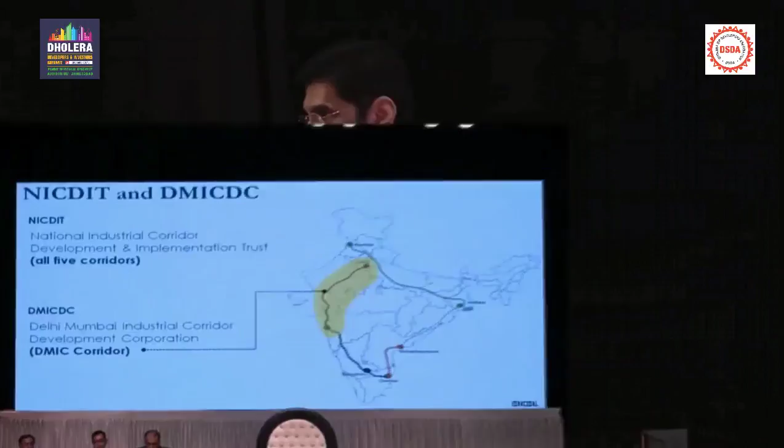So now you know the difference between where Dholera is as a greenfield smart city and where the other smart city programs are. They have no connection, the funding mechanism is different, and the management is completely different.

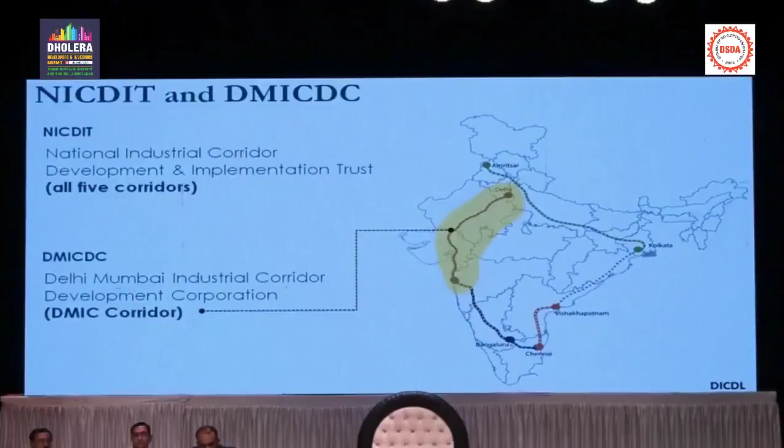But they are routinely mixed up. One is called the other, and people call it a smart city Dholera, and they think it's a part of the brownfield smart city.

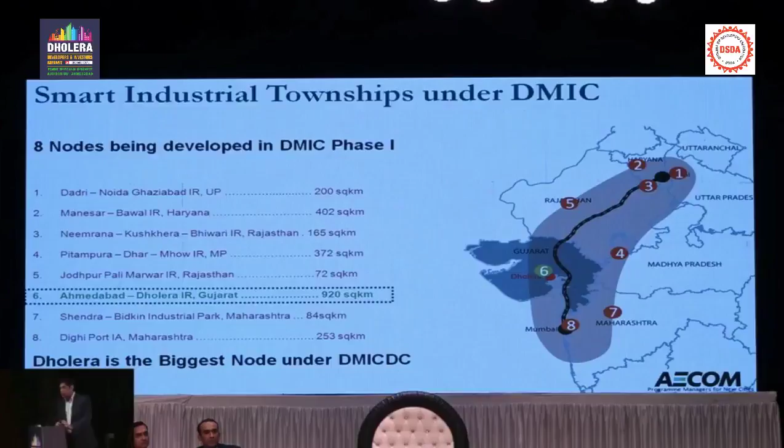So on this Delhi-Mumbai industrial corridor, there are 8 different nodes, as they call it, industrial areas that are planned. You can see number 6 is Dholera, and this is the largest node on this Delhi-Mumbai industrial corridor. So Dholera is the largest. It is also the node that has come farthest along in terms of construction.

So how big is Dholera? Dholera is 920 square kilometers, but if you compare that to some countries like Singapore, it is even bigger than Singapore. We are almost building a country like Singapore, because Singapore is 71,900 hectares and Dholera is 91,000 hectares. So it's almost 20% bigger than the country of Singapore.

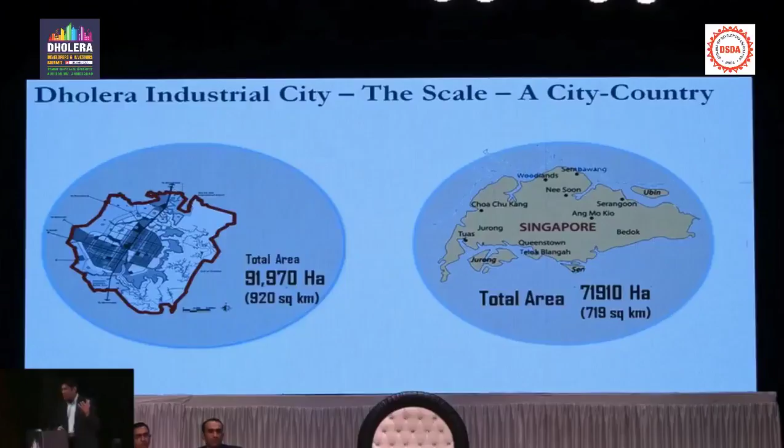So now you can imagine why it takes time, and I will explain that also.

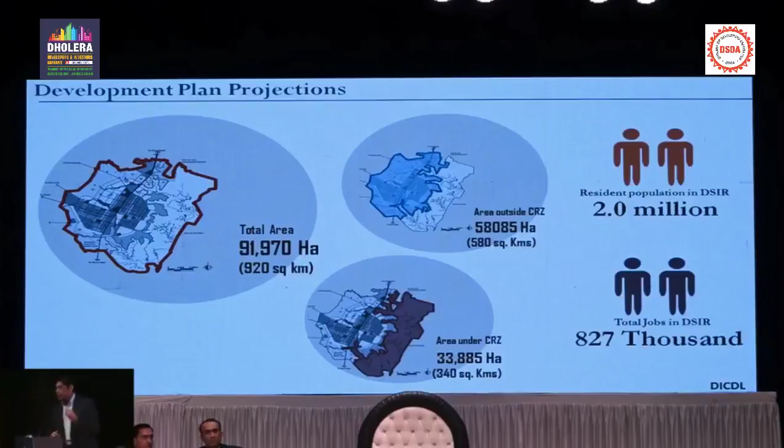I've been working on this project since 2013, and a very common question that comes to me is, why does it take so long to build a city? So I wanted to show you the timeline as to why it takes so long.

In 2009, we enacted the SIR Act. But once the SIR Act is enacted, several things have to happen before you start building a city. You have to create a development plan, which takes some time, and then it has to be approved. To get a sanctioned development plan takes anywhere from 3 to 5 years, because it is a formal, official document of the government of Gujarat. It has a public review process, a public comment timeline, and it takes that long. You cannot rush it. It's like saying, deliver me a baby in 3 months - the baby will take 9 months, give or take a month. So a development plan will always take 3 to 5 years because it is a time-consuming process.

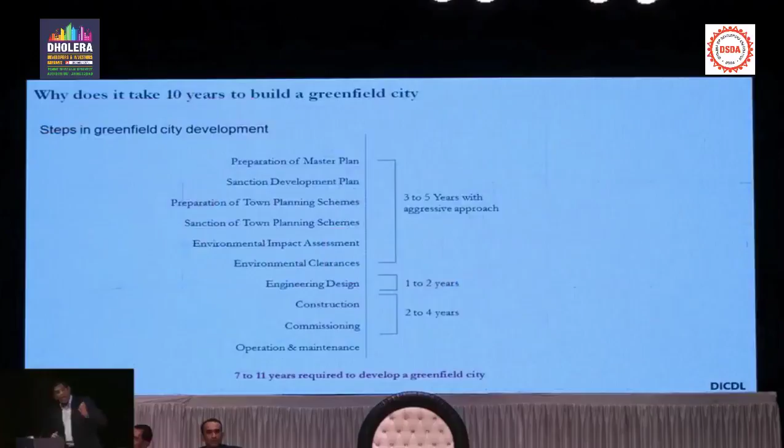After the development plan, we have to do the design. After the design, then we have to do the construction. So you can see, by the time we go through the entire process, we are anywhere between 7 to 11 years.

Now Dholera - जैसे एडवर्टाइजमेंट किया था, मोदी जी ने पहली बार बताया था 2009 में मेरे ख्याल से, धोलेरा शहर आएगा, बहुत बड़ा बनेगा, सिंगापुर जैसे होगा, and everybody was saying, कितना देरी हो रही है, how late it is becoming, you cannot build a city.

But now you can see why it takes time. There is no way - maybe एक आध साल हम ज़्यादा expedite कर सकते थे, but some of these things take time: development plan, design, construction. So these all take time, and it takes 7 to 11 years to build it.

I also want to put in perspective Songdo in South Korea, which was the latest brand new city like Dholera that's being built, started in year 2000. Today, in 2017, it is only 50% built, and it is only 8 square kilometers. We are 22 square kilometers starting with, going up to 900, and Songdo is only 8 square kilometers, and it is taking them 15 years.

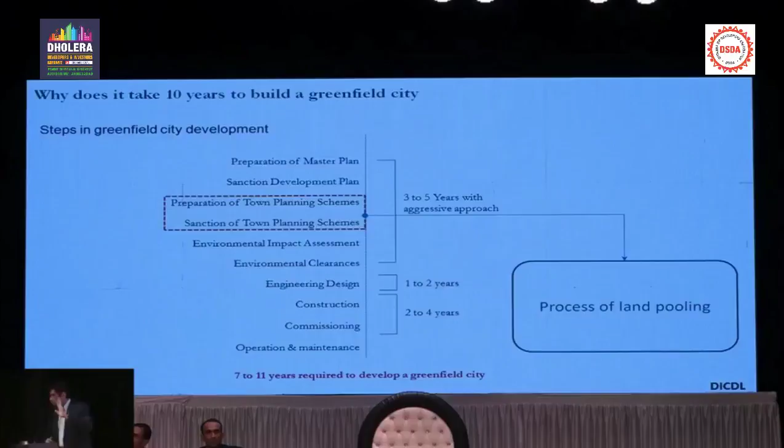So we are not behind in terms of benchmarking in the world. We are doing a great job. So I want you all to know that the state of Gujarat, the Gujarat bureaucracy, and the engineers are all doing a fantastic job. So don't worry, this will happen, and I will show you how this will happen.

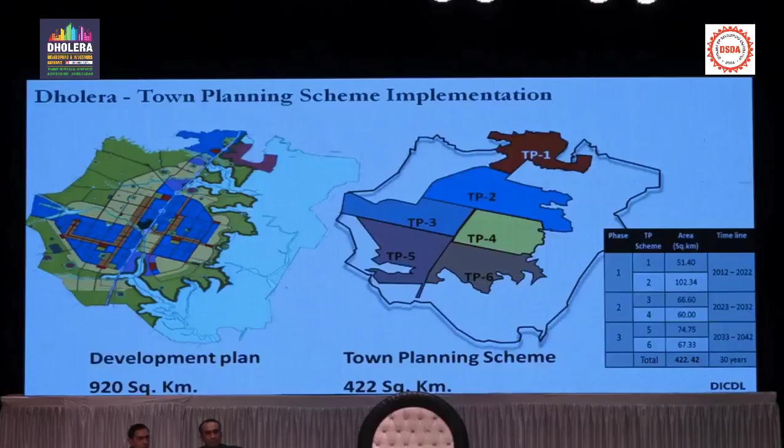So phase 1 is up to 2022. We are doing the construction. Uske baad phase 2 aur phase 3 chalu hoga, right? But within phase 1, if you look at phase 1, it is 153 square kilometer, which is TP1 and TP2.

हमने इस पे कंस्ट्रक्शन करने का काम चालू किया था 2013-2014 में. But we soon found out that the cost of building trunk infrastructure - those of you who are in construction will appreciate this - for 153 square kilometer is close to 40,000 crore.

अभी ये 40,000 crore investment हमको कौन देगा? Because there is no private investor that's going to come and build all the pipes - water, wastewater, power, gas - everything has to be built, right? So what we had at our disposal, हमारे पास खाली 3,000 crore थे जो गवर्नमेंट ऑफ इंडिया ने हमें ग्रांट दी थी. तो 3,000 crore में हम क्या क्या बना सकते हैं, तो हम बैकवर्ड्स कैलकुलेशन करके हमने एक 22 स्क्वायर किलोमीटर का फुटप्रिंट चुना. ये 22 स्क्वायर किलोमीटर के फुटप्रिंट में हम 3,000 से 4,000 करोड़ खर्चा करके पूरा इंफ्रास्ट्रक्चर बनाने वाले हैं.

Complete ready-made infrastructure - we call it plug and play. So you come in to the plot, everything will be ready to plug in, just like a new laptop nowadays.

Now 22 square kilometers, लगता है कि क्या छोटा है, 900 square kilometer किधर, 22 square kilometer किधर, but आप सोचो 22 square kilometer is about the size of the city of Mumbai, the island city of Mumbai - from Colaba to Bandra is 26.2 square kilometer.

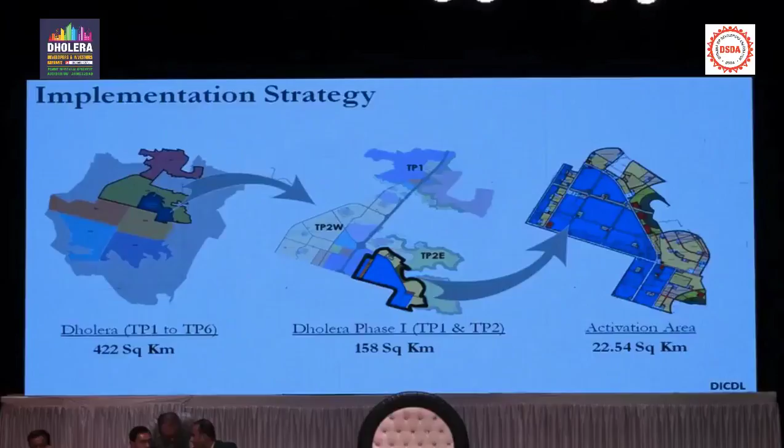क्या आपको बंबई छोटा लगता है? Okay, so this is not that small - 22 square kilometer is a city in itself. Gandhinagar is about 40 square kilometer total, and its planning started in 1965, but even now it's not 50% complete. So new cities take time, and 22 square kilometers is not a bad size - it's actually big, but because of industrial production, it will grow very fast once companies start relocating. So within this 22 square kilometers, this is the breakdown.

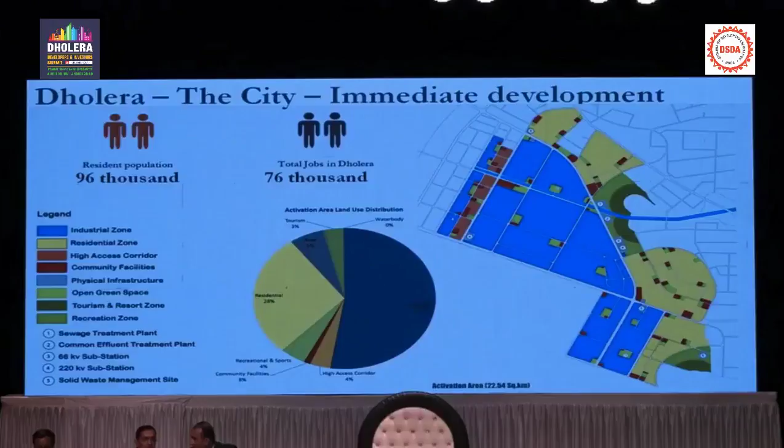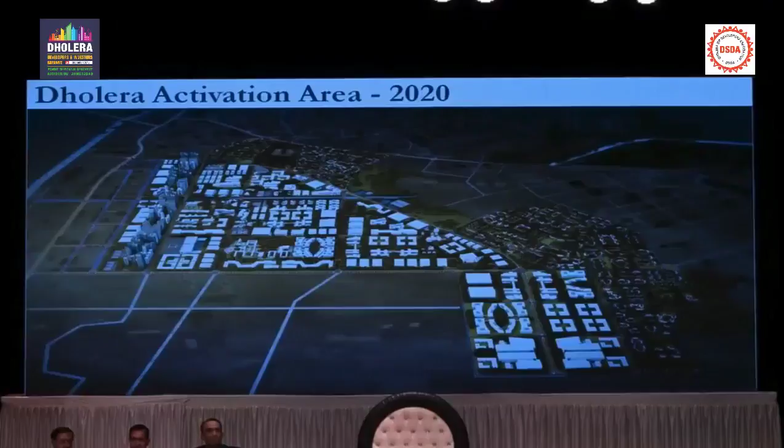So this 22 square kilometer is our footprint, and this footprint of Dholera is going to be managed by DICDL.

DICDL is a special purpose investment vehicle, an SPV, formed between DMIC-DC and the state government of Gujarat. This is a special partnership, 51-49%, in which DMIC has put in 3,000 crore cash and the Government of Gujarat has given 3,000 crore worth of land. So our corpus became 6,000 crore, and with this 6,000 crore we have started the initial trunk infrastructure.

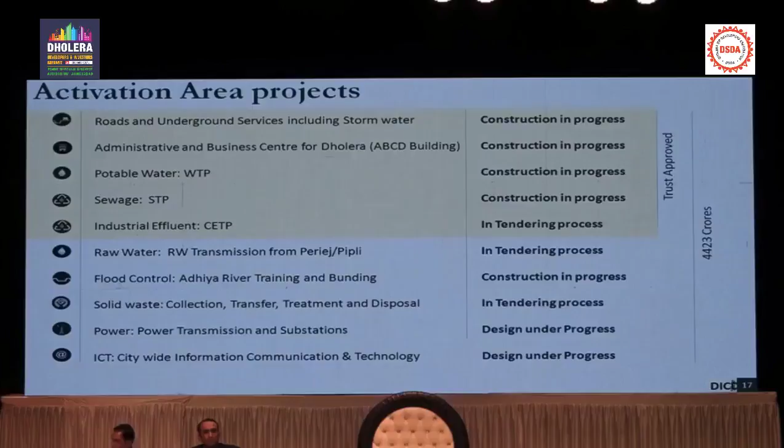So what are we building in Dholera right now? We are building all these trunk infrastructure projects - this is what the DMIC Trust has approved right now, and the trust approval is 2,784 crores, which is the money already authorized to us. The balance of 4,400 crores, we are going to find through PPP, a private partner - mostly on the power and water side. We will figure out how to get that funding done, but right now we are proceeding.

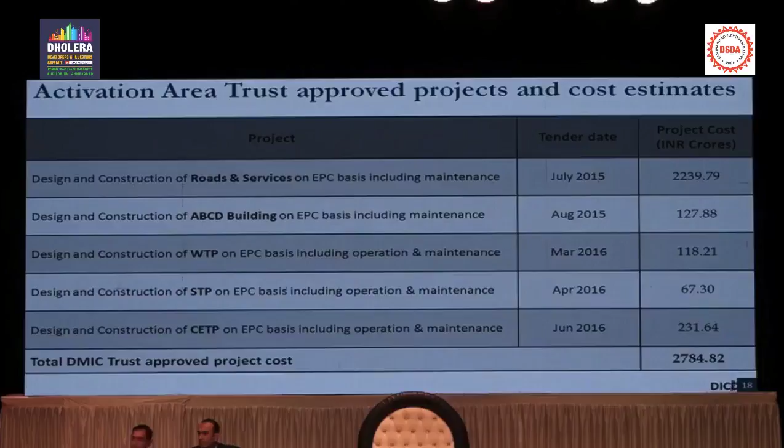We have 5 construction contracts already let out. L&T has the largest construction contract - you saw them in the film earlier today. Cube Construction, CCEL, is doing the ABCD building. L&T is also doing the sewage and the CETP. And SPML Construction from Delhi is doing the water treatment plant. So we have the country's largest 5 contracts being let out at this amount.

Now I want to get into connectivity, because the second most frequently asked question to me is: your Dholera is so far away, 100 kilometers away - where will people go, how will they settle there, who will go to live there? So I want to remind everyone that there are many places in the world where you start a new city that's 50, 60, 80, 100 kilometers away, but very soon, over 10-20 years, it merges into the nearest main city.

In our case, we are hoping that Ahmedabad will be the nearest main city because it's a more vibrant, bigger community. We are also introducing this concept of twin city, where Dholera and Ahmedabad will become almost like a twin city. Maybe not now, but in a few years, because the corridor between Ahmedabad and Dholera is right now building a 6-lane access controlled expressway.

That expressway is actually under design by the National Highways Authority of India. It has already been funded, and land acquisition has started.

We are also building a metro inside the expressway that will reduce the commuting time between Ahmedabad and Dholera to less than 45 minutes. When that happens, distance will no longer be an issue, and it will become a true twin city concept. With a metro, you can sit, sleep, read your book, be on your Wi-Fi, and at the same time go to work, relax, and not drive.

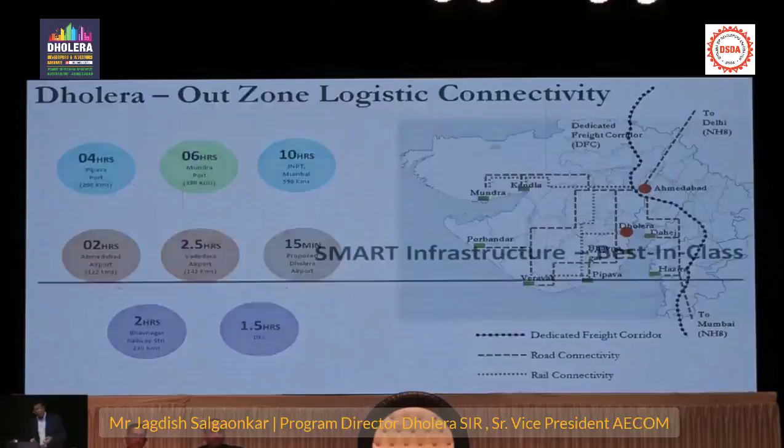Okay, so now let me switch gears a little bit and speak about smart cities. I'm sure the word smart cities has been so overly used that people are curious what it actually means.

Can anyone give me a one-line definition of what smart city means to them? Does anyone have that? Okay, well I'll give it a shot then. This is sort of my own definition, compiled from many different sources, but it's really our thinking of what we have come across.

A smart city — the city itself is an inanimate object, it is just a dead thing. But what makes it smart is that we have installed systems, processes, and devices into this infrastructure so that people, you, businesses, can make smart decisions. Let me give you a few examples of smart decisions.

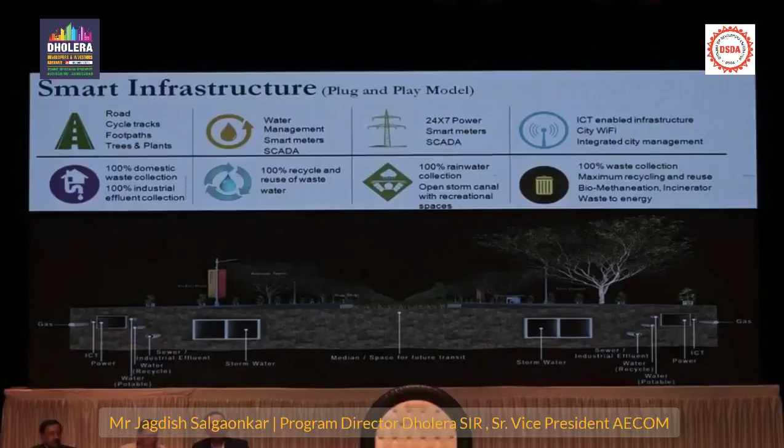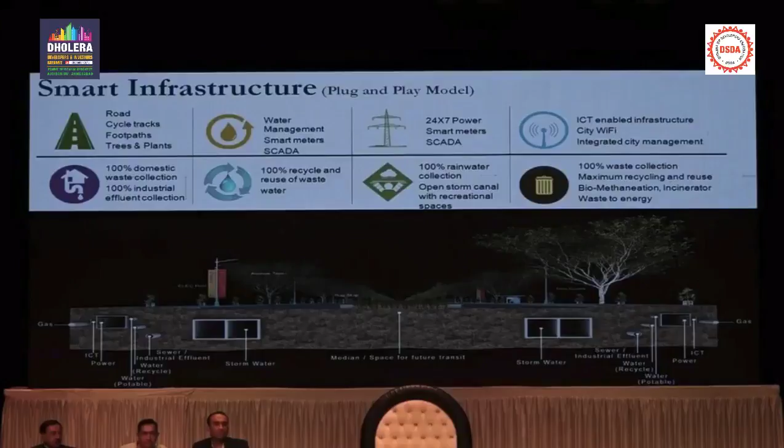Here's a snapshot of everything we are building. This is a typical cross-section of our road, and there are a few points I want to make. Number one, for the first time in India, we are building all of the trunk infrastructure underground - water, power, ICT, gas, wastewater recycle, everything is buried underground, even the power lines.

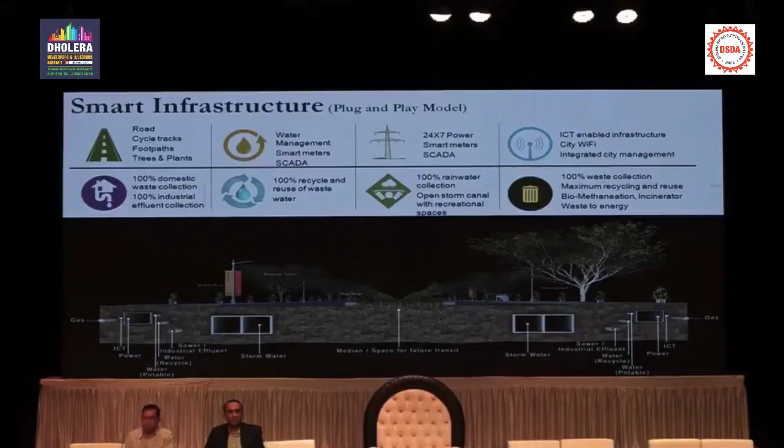All of this costs money. You don't get this kind of infrastructure in any industrial estate in India, in any city in India. That's why Dholera is world-class and the best.

In terms of different infrastructure, let me give you the highlights of each component. In roads and services, for example, we are building almost 300 kilometers of lane-kilometers of road - a total of 72 kilometers of road, but with multiple lanes, so we call it 300 kilometer-lanes of road.

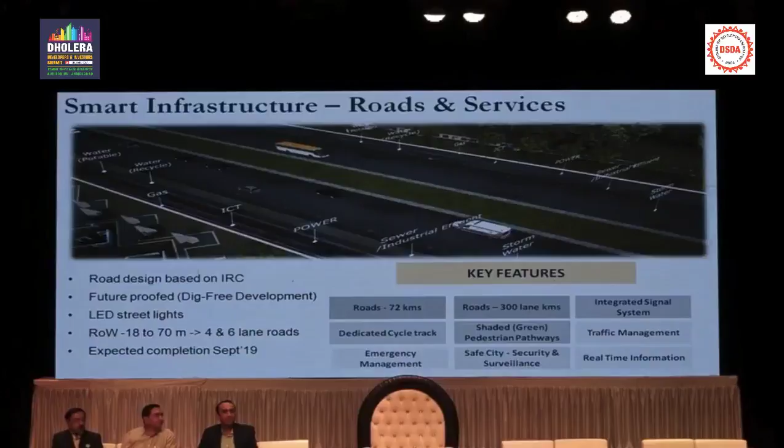It's a completely integrated traffic signal system. Each traffic light is going to have cameras, speed limits, sensors. All that information about devices being smart will be transmitted back to you, so you can make decisions about which road to take. That kind of information is going to be proactive, not reactive.

We have dedicated cycle tracks. You can see how the cross sections are designed, and this is the overall roadmap.

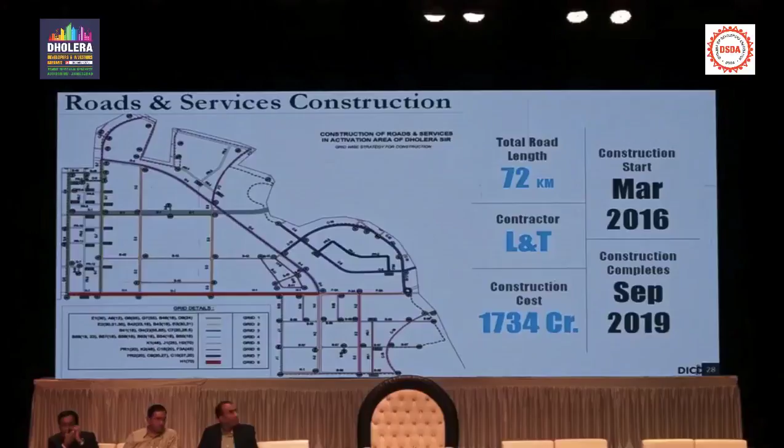It doesn't work on the screen, but G4, that line that comes from Dholera village, that is the road G4 right now that's being built. I'm sure anybody who has gone to Dholera can start seeing now the city is beginning to take some shape and form.

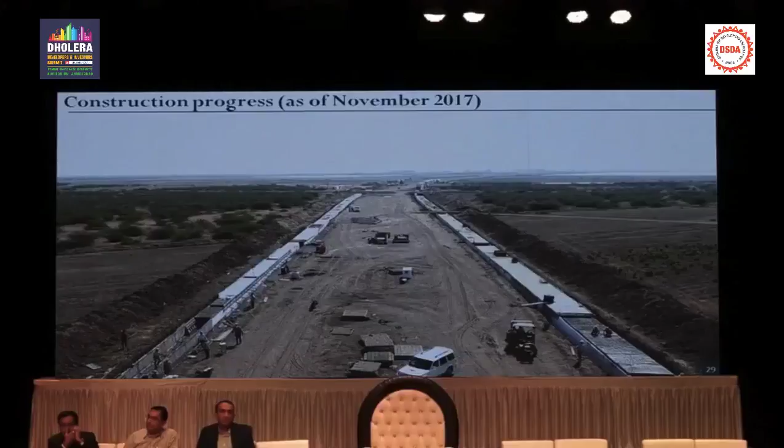In terms of power, like I said, it's a completely underground transmission system. Power is going to be available in March 2019. Right now we have invited private companies, both Torrent and Adani are applying for the license with GERC, and GETCO is building the transmission line. Both of those components will be ready by March 2019 at the latest, or even sooner.

Then in water, which is by far our smartest component because of the technology involved, we have quality meters, so you get the ultimate best quality of water.

We have district metering on water, and then we have smart meters as well as a leak detection system. This is another component which, to you as consumers, is going to save a lot of money.

Leak detection is a major problem in all the cities in India. For example, in Mumbai, about 34% of the water that's produced, which is paid for, gets lost or stolen. In Ahmedabad, about 17 to 23%. And who pays for the lost water? The existing customers pay, right? Because it has loaded onto your cost.

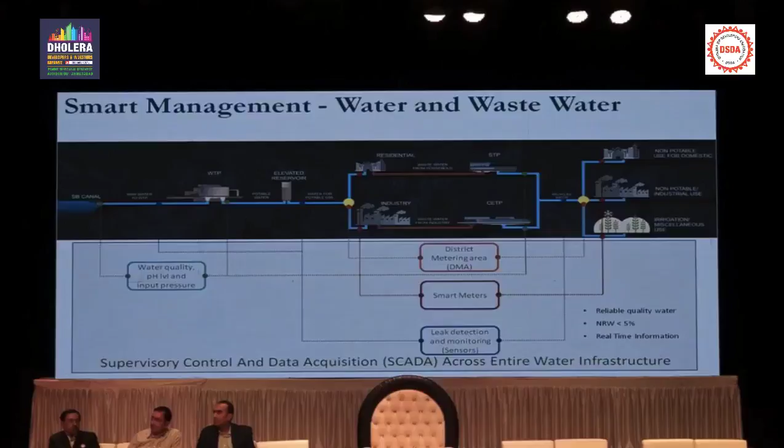All the points I'm making is we are installing all these smart features not just to increase the cost, but because eventually the consumer is going to pay less in the long run, because all we look at is life cycle cost savings. That's what we look at.

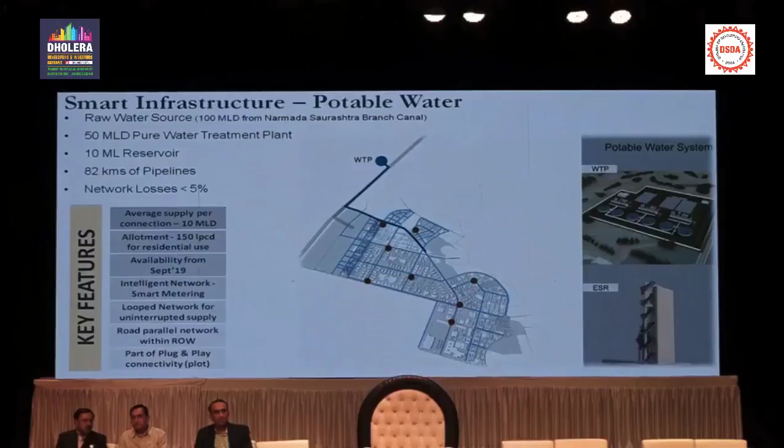In terms of potable water, we are bringing in 10 MLD of water immediately, and it will be ready by March 2019, or maybe June 2019. And then again, everything is smart metering. I think it's the same system.

Recycled water, that's another unique aspect of Dholera, is that we have 100% recycling of wastewater. I think this is probably the first city in India that is doing 100% recycling. And all of this wastewater is going to be used for industrial water use.

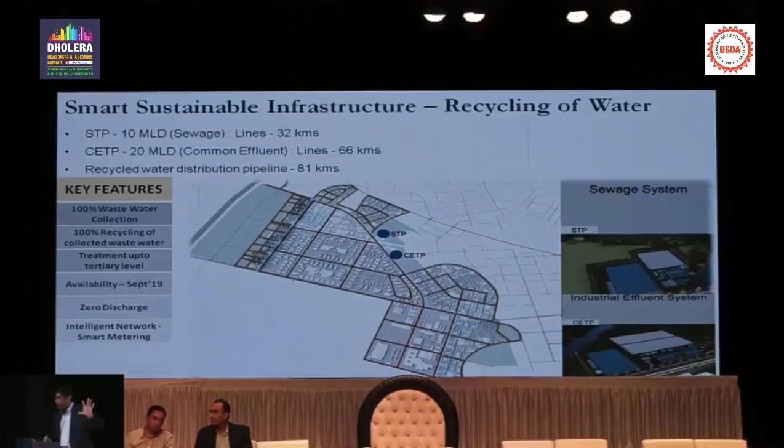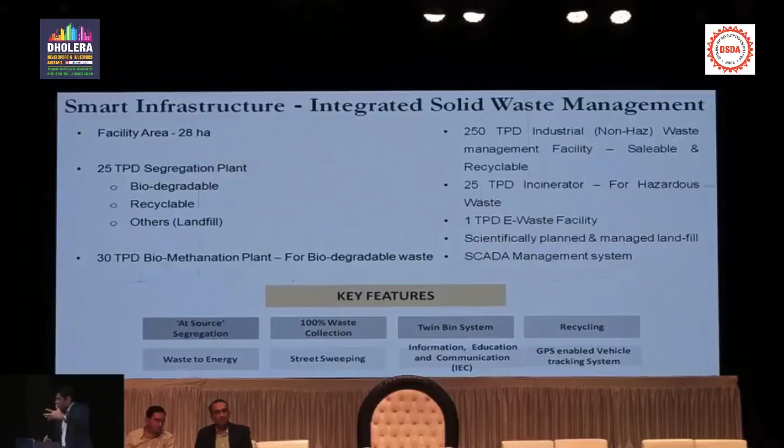In terms of solid waste, again, it's door-to-door collection of solid waste. Everything will be collected in separate bins, 100% recycling, composting, biomethanation, gas production. So all of those things are planned. Although solid waste will take some time because as people come in, you generate garbage. You don't need it on day one. So maybe 2 or 3 years down the road, we will do that.

So this is our investment. You will not find any other city in the world building these kinds of sensors and technology into your smart city structure.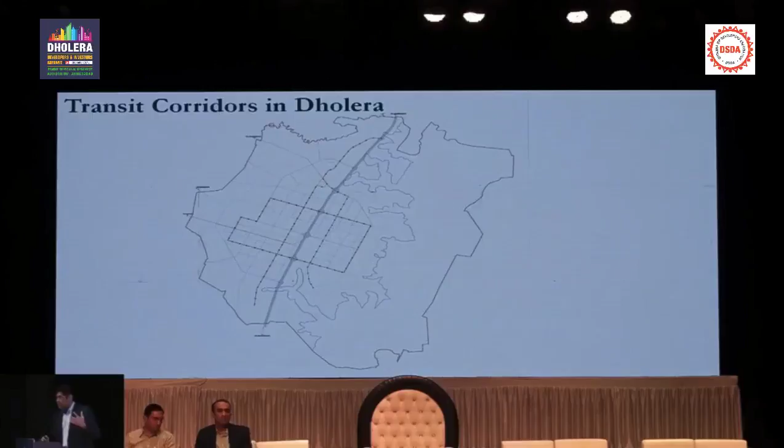Okay, so that leaves us with the infrastructure components. Now let me get into the urban transit and the livability aspects of Dholera. So far we have talked about businesses and infrastructure and utilities. So what this shows you is what we are planning from a transit standpoint for Dholera.

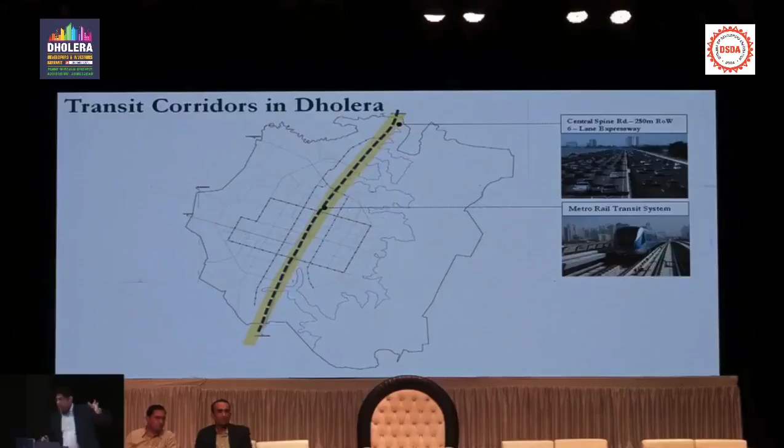Like I mentioned earlier, there is a metro within the expressway. The yellow line is the expressway, and there is a metro that's going to run from Ahmedabad to Dholera. It's currently on the JICA funding plan for 2019. Then there is a light rail system planned, which shows you the green and blue lines.

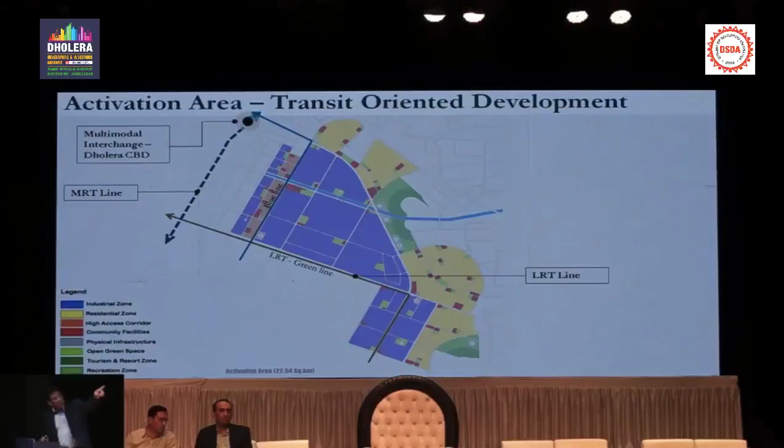And what I wanted to also show you was the transit-oriented development we are planning, where the metro is coming on this line. You've got the green and blue light rails, and then you've got the bus terminal, and this orange patch that we show is our high access corridor. High access corridor is mixed use development, high FSI, and it's going to be like what they would call the downtown. It's going to have a transit-oriented development where you will have all kinds of businesses, commercial, and residential development going on in one place.

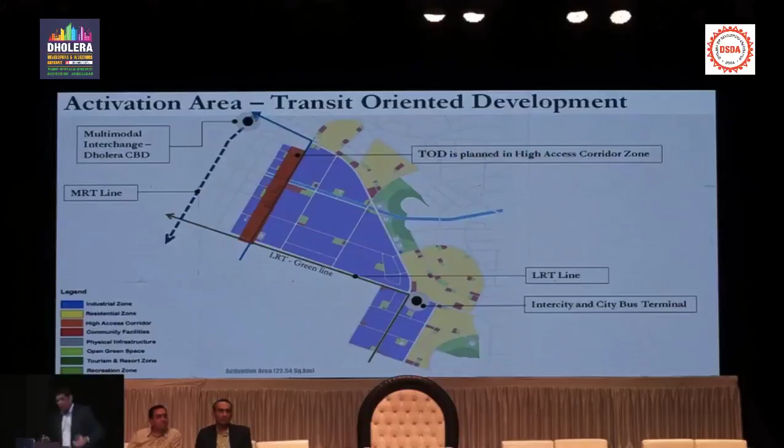People routinely confuse flooding and flooded area with inundation. That is a technical difference between the two terms. Inundation means when water has nowhere to go because it is so flat that it has no ability to drain.

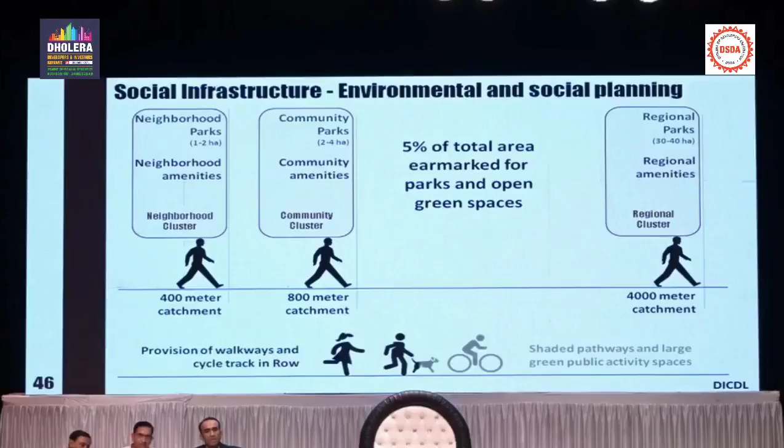So what are we providing in each of these different parks? In a regional level park, for example, we have all these different facilities, typically clustered around the park, so it will be easy for people to find where those clusters are. You will have all these different things.

When you come to neighborhood and community levels, you can see in a neighborhood park there will be a primary school, nursery, and local markets. In a community park, you may have integrated schools like a high school, an Anganwadi, and a community market. So there is a distinction between a short walk for smaller, quicker needs, and a further walk for larger activities.

This is how we have spread out all of the social infrastructure, and this is already pre-planned. So you will not find some school coming up anywhere, or the zoning being changed—nobody can change the zoning in Dholera. It's pre-planned and fixed, so you know exactly where all these facilities are, shown on the right-hand side and located on the map. I know it's hard to read, but they are all properly shown on the map.

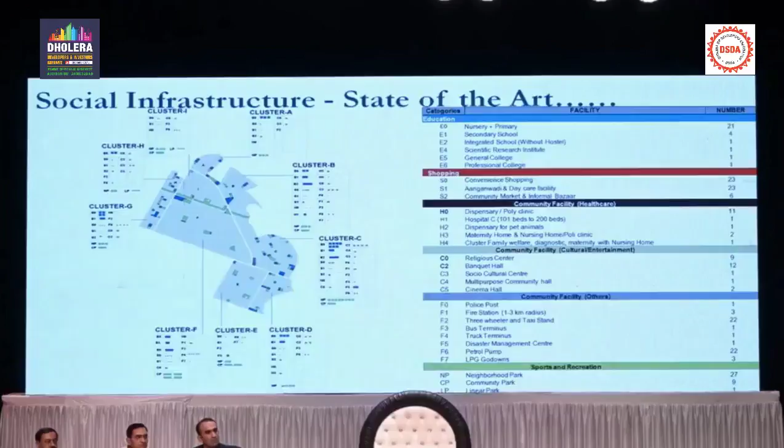So you can know exactly, if you are planning something in Dholera, where all the social facilities will be coming up. I talked about the canal earlier, and we see great opportunities in the canal, particularly for me, coming here to Dholera and designing a brand new city.

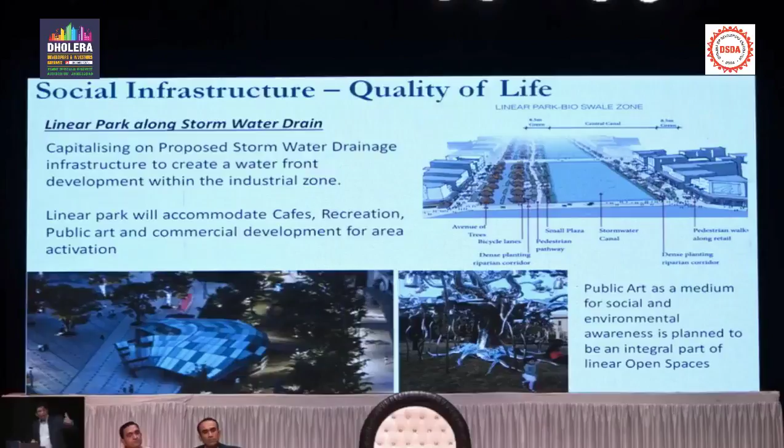So we are trying to bring that back through this whole canal feature, where we may have art and artistic expressions. We may create zones that will allow people to showcase their art culture. We may create zones where we can demonstrate Swachh Bharat, some of the national initiatives like Swachh Bharat.

So we are trying to create an environment where family is just as happy as businesses, where we have a lot of open spaces, a lot of parks with good kindergarten schools, good school education, good public hospitals, public facilities. So all of these things are pre-planned. Now all that we need to do is get this tremendous audience interested and start building, right?

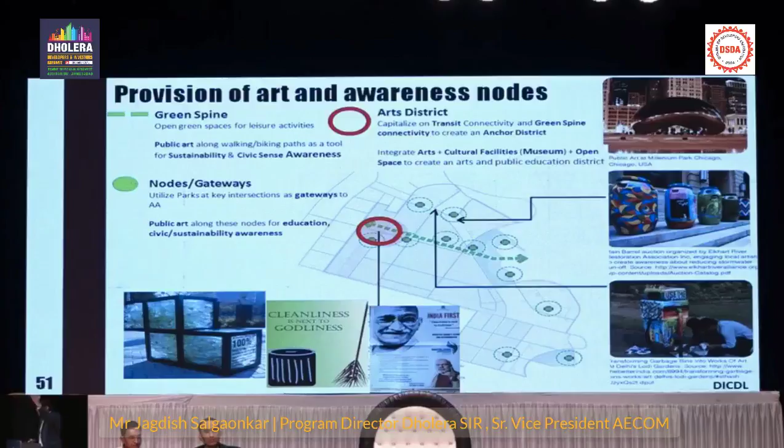You know, Ahmedabad uses a miniature version of this now. They have a police command control center. Surat also has one. But for a citywide one, nobody has one yet. So Dholera will be the first one.

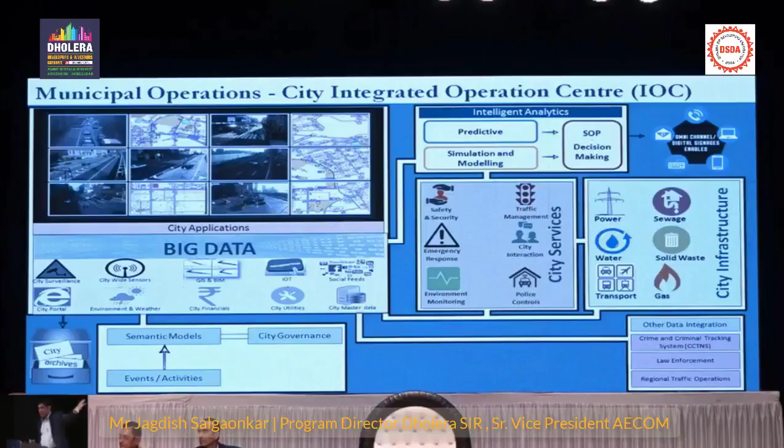And what I mentioned earlier, this whole cycle of gathering data, bringing the data into the control room, writing the computer algorithms and the analytics to give you the knowledge to make smart decisions is going to happen here. This is the brain of the city, which is going to reside in the SPV building. You saw the building earlier that's being built.

Smart governance, which is again a paperless form of government. Nobody should be required, in today's day and age, to walk to city hall or city offices to get a driver's license or pay your fees or bills. All of that will be online. You should be able to do it on mobile, you should be able to do it on your laptop. Everything will be online, and this is going to be built in.

This is already being done in many places throughout India, because this is the easiest place to convert a brownfield city into a smart city. So a lot of the brownfield cities are already doing this. But for us, it's a way of life in Dholera. It's going to be part of our...

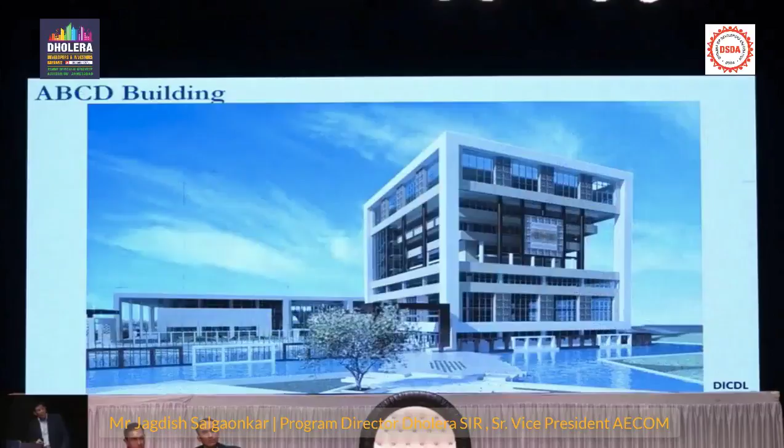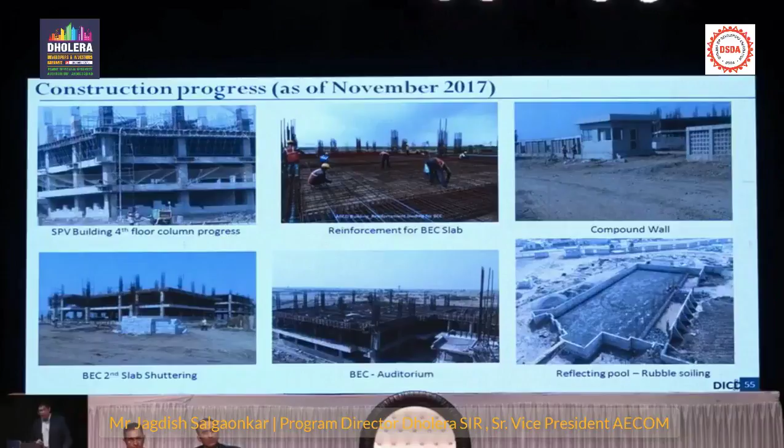And this is the ABCD building. I mentioned this is the construction that's already going on. You can see some of the pictures there. I think the video that was shown earlier on was a fantastic video that showed you some insights on the construction that was going on.

So probably of most interest to all of you is, what are we selling, when are we selling, and for how much are we selling? So you can all do your businesses, and I see a lot of crorepatis in here in the next few years.

This is all of the zoning that I mentioned earlier. Blue is industrial. The same thing you can see on the right-hand side is all of the plot sizes. So we have 0 to 5 hectares, 25 plots; 5 to 10 hectares, 17 plots. Now those plots, these are plots owned by the government.

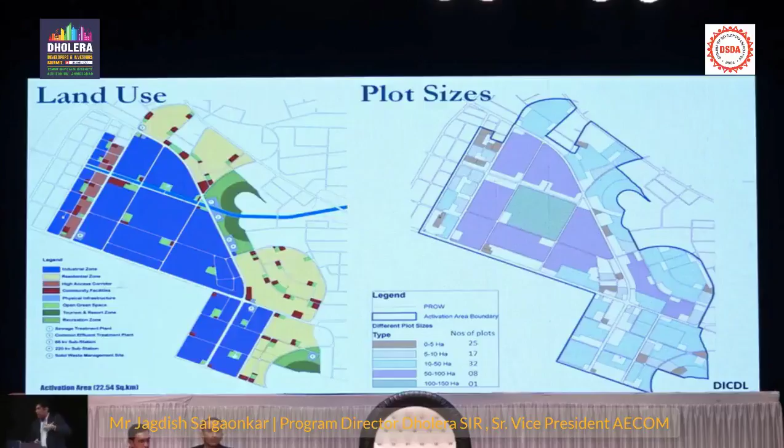There are many, many private players in the activation area. We have not listed their plot sizes yet. This is only what government is selling right now. This is what we are targeting our audience, which is the industrial clients that we are selling to.

We are also advertising heavily for selling our land. We have made a commitment that of the initial 5,600 hectares, we will give allotment in 17 days and possession in 90 days. This is by far the fastest commitment we have made. This is our commitment to efficiency and transparency, and our complete land allotment system is online.

Anyone here can go online right now - that's the address right there. You can go online, select the plot, click on it, and it will give you information on the plot, the dimensions, and the setback. You can make an application online. That application goes to our general manager, Dilip Brahmbhatt, who's sitting right here. He then processes it and puts it up to the MD for approval.

There is a land allocation committee that votes based on the businesses. If the industry falls into one of the categories we really want, which is the mega investment category, and there are several formulas for that, we offer several incentives and discounts. So a lot of industries are talking to us right now and looking at it. As soon as we get a little bit above ground, in the next 3 to 6 months, we should have some idea of who our anchor tenants are going to be.